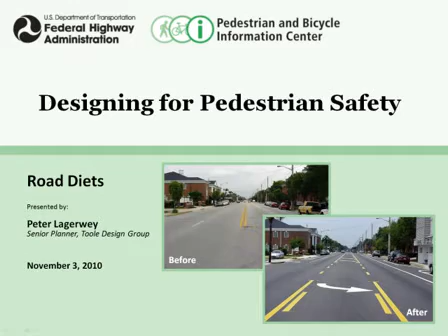One of the things I like to do is think of this as how do we divvy up a scarce urban resource? A scarce urban resource is our street right-of-ways. We have a lot of competition for that space. It starts with general purpose lanes, bus lanes, bike lanes, turning lanes, parking, sidewalks, buffers for sidewalks, street plantings, cafes, all sorts of things we like to do in our street right-of-way. One way to look at planning is to say, how do we divvy up this scarce urban resource? My focus today is that one of the things we should be looking at is doing road diets, because this benefits everyone, including motor vehicles.

So the learning objectives for today: first, to be able to describe how pedestrian crash risk increases with the number of travel lanes and speed. And of course the inverse is how pedestrian crash risk is reduced when you reduce the number of lanes, and how speed is reduced when you reduce the number of lanes. The next learning objective is to explain why reducing the number of lanes reduces risk and makes it easier to cross the road. I'll spend a fair amount of time talking about how this benefits pedestrians.

By the way, a lot of road diets are generated through pedestrian concerns and issues related to economic development, and sometimes it's driven by the need to put in bike lanes, but not always. There are so many good reasons to do road diets, and sometimes the bike lanes are almost incidental to other bigger factors in communities. It's not to minimize the bike lanes, it's just to suggest there's a lot of different ways to get to the decision to do a road diet.

I also want to demonstrate how reducing the lanes frees space for higher and better use. One of the concepts I'll introduce here is total road counts. In other words, are we building roads to just count motor vehicles, or are we going to count people? One way to look at that is when a bus has 30 people in it, does that count as 30, or does it count as one vehicle?

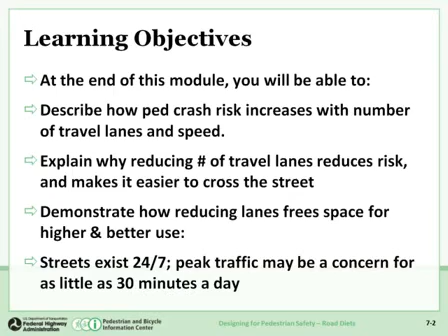So the classic road diet, you can see the picture here: on the left, 4 lanes, 2 lanes in each direction. This is Street Anywhere USA, you can find this street, or a similar street, any place in the United States. Going over to the right, going from 4 lanes to 3 lanes, you can see instead of 2 lanes in each direction, there's only 1 lane in each direction with a center turn lane and bike lanes added. That's your classic road diet, but I'm also going to show you some other examples of different kinds of road diets, including one on a one-way street.

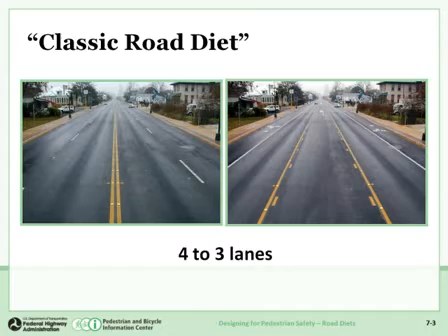So road diets, we reclaim a street for a lot of different uses. This happens to be in Seattle. In fact, I was on the street this morning, less than a mile from my house. And there was an opportunity here to redo the street.

Just as an aside, one of the things we always look for in terms of opportunities to make changes to the street system is whether there's a possibility of tying it to another project. You'll see the newer looking concrete in the center of the street here, and that was because there was a huge sewer line that went down the center of the street. So as part of reconstructing the street, the median was added, you can see that there, along with the center turn lane, and the on-street parking had a little more space. Further up the street, bike lanes were installed.

Since this picture was taken, the bike lanes were actually brought through this section, so if we took the picture today, you'd see the bike lanes here. So you can see that this used to be a 4-lane street, 2 lanes in each direction, and we're able to put in the median, the bike lanes, the center turn lane, and really change the feel and the look of the street. And of course, it still accommodates transit, you can see the bus pulled over there at the bus stop.

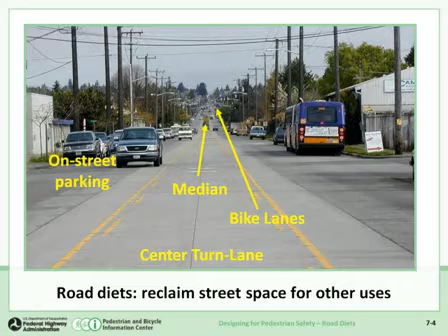So road diets and traffic operations, this really gets into some of the nitty-gritty details that you always have to work out when you're looking at doing a road diet. First of all, I'll just talk a little bit about crashes and safety.

The question here is, what types of crash types can be reduced by going from 4 lanes to 3 lanes? On the left side of your screen, you see a typical street, 2 lanes in each direction. On the right, a typical road diet, you see 1 lane in each direction and the bike lanes, and you also see we've added a left-turning car in that center lane. So that's again your classic road diet.

By the way, you'll notice that trees have been added on the right side too. One of the great things that bike lanes can do is in some situations where there's discomfort with putting in street trees because of concerns about being too close to a travel lane.

Sometimes when you put in a bike lane, it gives you permission to add street trees, which is a wonderful addition. Street trees change the feel and character of a street, and they add value in terms of signaling that this is a place to expect bikes and pedestrians, to slow down. It's a neighborhood. It's all about the messaging that a street gives.

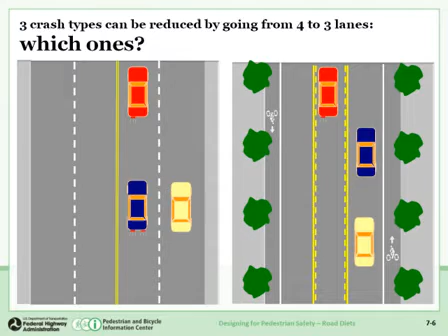That said, let's turn back to the crash types, and we'll go through three different crash types. If you look at the image on the left, you'll see the red car has its blinker on and is going to make a left turn. One of the common crash types you get on a typical four-lane road is rear-end crashes.

This, of course, will vary a lot from road to road. If you're on a road with very few driveways, not in a strip development area, and few left turns, this won't be a common crash type. However, on a typical suburban street with lots of driveways, fast food establishments, restaurants and other businesses, you get a lot of left-turning movement and a fair number of rear-end crashes. If you look to the right, the red car is turning left, and there's no one behind it to cause that kind of rear-end crash. So this is one typical kind of crash that's reduced by going from 4 lanes to 3 lanes.

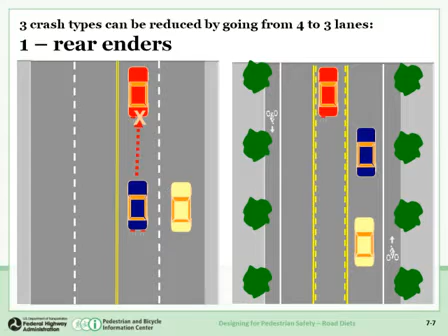A second kind of crash that can be reduced is the sideswipe. We've all experienced this, and probably all done it: someone's turning left in front of you, so you switch lanes and move to the right. Looking at the image on the left, you swerve right so you can continue your trip and momentum without stopping for that left-turning car. Of course, that creates the possibility of sideswiping or cutting in front of a car in that right lane. Cars have blind spots, so the more lane switching you get, the more likely you are to have a sideswipe crash from time to time. Looking at the image on the right, there's no reason to switch lanes because through traffic is already contained within that right curb lane.

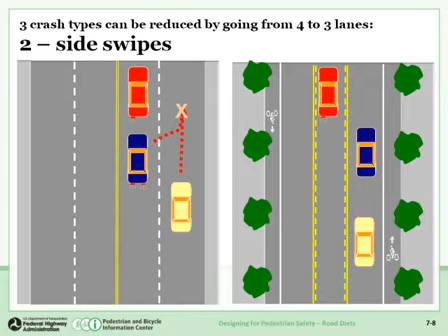There's a third kind of crash that can be reduced by going from 4 lanes to 3 lanes. If you look at the left, the red car in the upper left is making a left turn. Looking at the sight distance drawn in, there are 2 cars coming, one in each of the 2 travel lanes, and you can see how the sight distance is blocked, one car blocking the other. The blue car going north is blocking the yellow car going forward. Now, if that blue car creating the sight distance problem were a panel truck or a bus or a bigger vehicle, this kind of problem becomes even more acute.

I like to compare this to the multiple threat we've all heard about with pedestrians crossing streets. We know from studies that people are frequently hit in that last lane when crossing a 4-lane street, because motor vehicles stop for pedestrians in the first 3 lanes and then get hit in that 4th lane because of this same sight distance issue - the stopped cars stopping for the pedestrian block the sight distance for that final car.

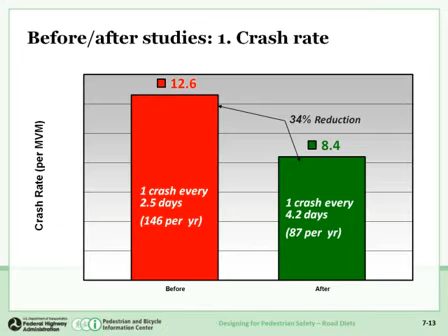So they did some studies, and again we're just looking at this particular example, but I think it's typical of what you find in a lot of road diets, is the crash rate went down. Before they did the road diet on this street, there was one crash every 2.5 days, or 146 crashes per year along this corridor. There was a 34% reduction after the road diet, one crash every 4.2 days, or 87 crashes per year. Different road diets are obviously going to get different numbers, but I think it's typical to see crash reduction rates in the 30 to 40% range. Sometimes it's a little lower, sometimes it's a little higher, but this is probably fairly typical.

If you look at the injury rate, it goes down even more dramatically. One injury every 9 days to one injury every 30 days, a 68% reduction. And this is kind of interesting, and again, this is pretty typical. What happens is, first of all, you have fewer injuries because, we'll look at this in a minute, the speed goes down. So if you have lower speeds, when you do have a crash, you're going to have fewer and less severe injuries.

The other thing that changes is the kinds of crashes that occur. You tend not to have those really terrible T-bone kind of crashes that you get when you're making a left turn and you go in front of somebody else, or even rear-end crashes. More of the crashes you're going to see are sideswipes and some of those kinds of things, so you not only get a reduction in crashes, but a pretty significant reduction in injury crashes. Most of the data I've seen, looking at before and after road diets, seems to validate that injury rates go down actually a little more than strictly the crash rates.

This is kind of interesting when you start looking at the speeding. If you look at the left side here, note that this is the percent of vehicles traveling over 36 miles an hour. The speed limit here is 35 miles an hour. They looked at 3 different sections of this corridor and got some of the changes in that reduction. Again, this is fairly typical. I think it's important to note, though, that this is not average speed or median speed, this is just people who are going over the speed limit.

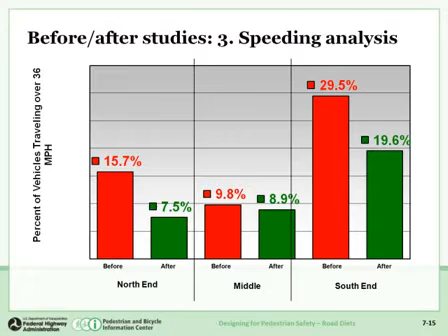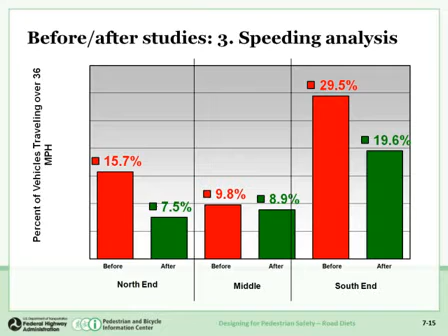What you're doing is quite often preventing the really high-speed folks from going really fast. So now you only have one lane, and that may not affect the average speed so much. In fact, it's not atypical to have a road diet and only reduce the average speed 2 to 4, or 2 to 5 miles an hour, which may not sound like a lot. But if you dig into the numbers, you find it's much more significant when you look at the outliers and the number of people going really fast. So speed is a tricky one, but you get more value out of it than might first appear.

Okay, traffic volumes. This is kind of interesting, and I'll spend a little time here because it comes up in just about every road diet project. In this particular case, they had about 20,000 vehicles per day, this is ADT. Initially it went down to 18,100, then slowly edged up to about 21,000. This little pattern is very typical.

When you first do a road diet, quite often there's a worry that it's going to be congested, so people take another route. Then people soon discover it works really well, it's not a problem, they come back, and it goes up to what it was before, if not a little bit more sometimes, because it might actually work better.

Talk a little about the numbers. People always ask, what's the range? What works for a road diet and what doesn't? Before throwing out a couple numbers, I'll suggest a few things to look at, because different roads are going to have different numbers for when it's appropriate to do a road diet. A couple rules of thumb.

If you have a lot of left-turning movement, if you're in a very urbanized situation with a lot of left turns, short blocks, a signal at every corner like in a downtown or semi-downtown situation, then you can probably go quite a bit higher on a road diet. In some situations you can even go up to 24,000, 25,000 and still maintain that after the road diet, if it's a very urbanized situation with a lot of left turn movement.

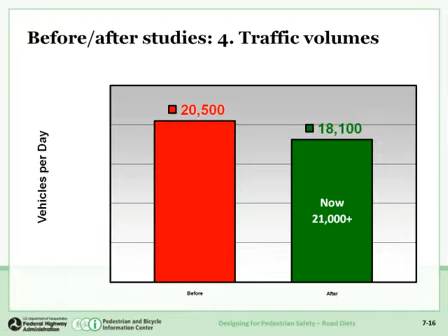And when parking utilization goes up, it means more people are shopping if it's a business area. But equally important is the messaging. If the parking is full, the messaging is: this is a center, this is a center of activity, there's a lot going on here, and this is a good place to stop and do business.

I always like to compare it to going to a town you're a guest in, and you go out for dinner, and you pass a restaurant that's completely empty. You think, the locals know something, it's probably not too good. Then you find another restaurant that's full of people. And as long as you don't have to wait more than 15 or 20 minutes, it might be a really good bet, because the local folks know it's a good restaurant.

Some of that same psychology applies to our neighborhood business areas, especially when it comes to parking. If you're messaging that there's parking here, and that parking leads to more people on the street, leads to energy, your messaging is: this is the center, this is a good place to be, stop, even if it's hard to find a parking spot. You want to be here because this is where everyone else is. So again, start making those links between road diets, parking utilization, energy, messaging, and economic development.

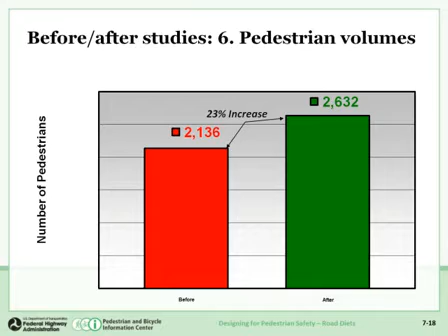And of course, when you get more people walking, that's more economic vitality. People shop, cars don't. So again, you start seeing that economic tie.

Bicycle volumes, in this case, had a 30% increase. They had a fair number of cyclists on the street beforehand, but it went up. This is very typical, very typical kind of jump. I'd actually suggest it might even be a little low; I think we're going to get much more than this in terms of a percent increase. But what it really highlights, and this is what people have been telling us for years, is that the biggest barrier to more bicycling is fear of motor vehicle traffic.

And when you put the bike lane in and you give bicyclists a dedicated space, people's comfort level goes up, and you get more people—the bike volumes go up.

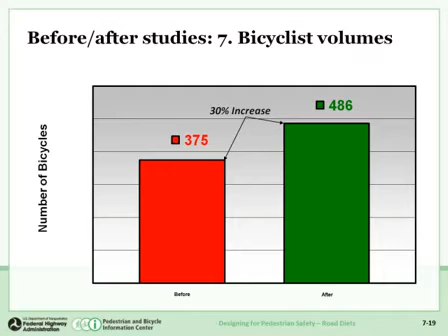I want to circle back to the concept of how we do counts. Do you count just the motor vehicles, or do you count the pedestrians and bicyclists, and a slide I didn't add here would be, do you count the number of people in buses and transit, streetcars, whatever you may have on that street. When you start looking at total street capacity, the story we have to tell about road diets becomes even better.

Looking at the study again, going back to our Orlando, Florida example—did the restriping accomplish the objective? Avoid increasing traffic on neighborhood streets: yes. That's something that always comes up as a worry, and checking that is always important. It's something we've done in Seattle on quite a few of the road diets done here. It just doesn't happen with road diets—people stay on the street.

Reduce speeding—we did that. Increase bicycle volumes—you saw the numbers on that. Same with increasing pedestrian volumes, reducing crashes, increasing on-street parking—increase.

These last two are a little fuzzy, but they're also really important, and these are things you ask people in follow-up surveys: did it increase your overall satisfaction? Do you like it? Does it work for you? The look and feel issues are so important, and they may be what drives ultimately transportation behavior—in some cases, more than just about anything else.

Is it inviting? Does it feel good? Are there people here? Is this where I really want to be, to spend my time, to do business, to live? Those softer kinds of things should always be looked at—they're really important. Usually you want to look at both people who live in the area and their satisfaction, and then also people coming into the area for business. Both very important.

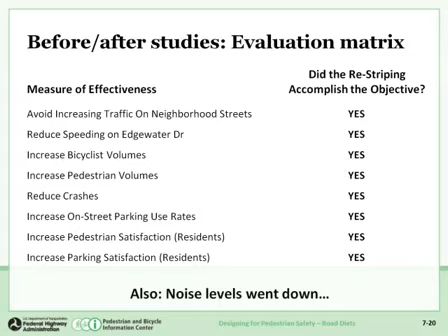One thing that could happen is people use the center turning lane as a passing lane—that does happen. That's why, when you do a road diet going from four lanes to three lanes, you want to build in some median crossing islands, spaced to do two things: provide a crossing island for pedestrians, and break up that line of vision to prevent people from using the center turn lane as a passing lane.

There's a lot you can do in that center turn lane. In addition to spot crossings, you can put in sections of median. That's sometimes controversial because it prevents left-turning movements into businesses—that's almost a separate topic, an access management issue in itself.

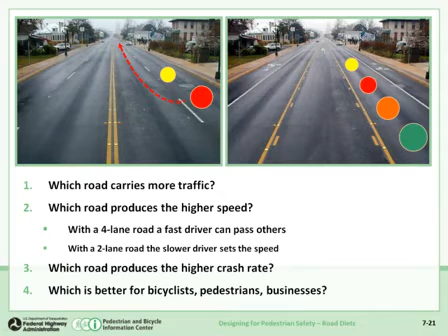Going away from the example and looking at the national average, there have been some studies done, and there'll be more studies coming out in the future. In general, you can expect close to a 30% overall crash reduction factor from doing this. For those of you who follow the CRF, the crash reduction factor, and look at all the different tools available to us—there are at least 50 or 60 standard traffic operation tools we have to reduce crashes—you'll know that getting close to 30% is a really high number in terms of effectiveness of a particular treatment.

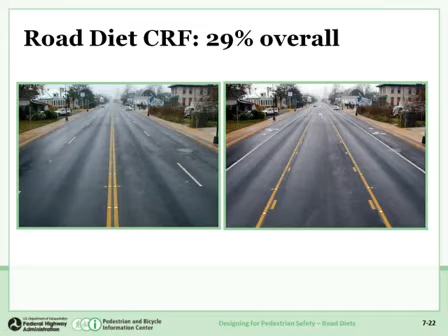So what are some of the benefits of road diets for pedestrians? I want to spend a little time here because, as I mentioned in my opening remarks, quite often road diets are driven by a need or desire to do something for cyclists, but increasingly I'm seeing road diets done because they really benefit pedestrians as well. One of the nice things about this is that everyone's a pedestrian, so you have a bigger audience to support this when you look at some of the things it does for pedestrians.

It reduces the crossing distance. And we know there's a relationship between the crossing distance and the number of crashes you're going to have involving pedestrians when they're crossing the street.

It eliminates or reduces the multiple threat. I touched on that earlier when talking about motor vehicles having a multiple threat when crossing two lanes. In this case, we're reducing the multiple threat for pedestrians because you cross one lane, and even if you don't put in a crossing island, you're only crossing 3 lanes instead of 4. If you install a crossing island, then you're only crossing 1 lane at a time. There's a pretty strong relationship between the number of lanes, the crossing distance, and the number of pedestrian crashes one might expect.

Almost always, crossing 1 lane of traffic is going to be very safe. Adding the crossing island allows you to cross the street in 2 steps, with the island serving in the middle where you can cross, stop, look, and cross again. You don't have to cross the street in one movement.

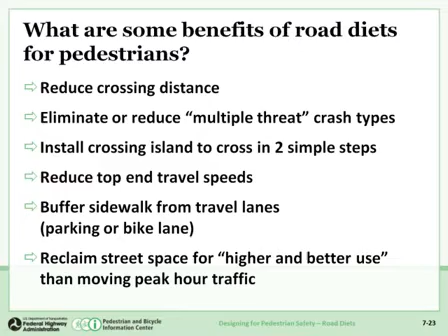And so you go to the next image, and this was the concept that was proposed. You can see adding a crossing island and adding the bike lanes, a standard road diet, 4-lane to 3-lane.

What this did, of course, is added the bike lanes, the buffer, but more importantly in this case probably is for the pedestrians - it allowed them to cross 1 lane, go to the center crossing island, and then cross the other lane. And once you cross that first lane and go to the crossing island, your sight distance opens up quite a bit, and you can see the oncoming traffic. So a crossing island can also be a tool to address sight distance issues if that happens to be the situation. Now here's the reality.

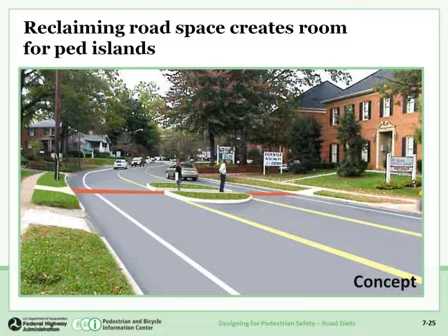This is what was put in, and you can see it worked very, very well, solved the problem. Again, you can see that it reduced the exposure time, the crossing distance - exposure time being the time that a pedestrian is in the street right-of-way where you expect motor vehicles and has that exposure.

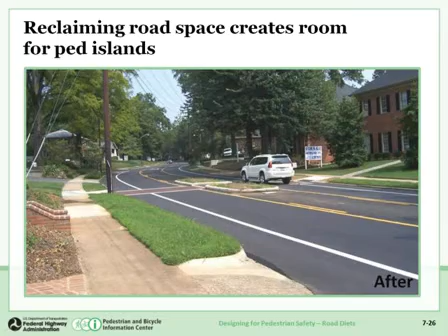I'm just going to show a couple more examples here. This one I really like, and I would encourage you to look at this really closely for a minute, because I'm going to show you the before and after. Just describing this, this is really a wide street - it has 2 lanes in each direction, center turn lane, plus parking. So a really wide street, and here's the next image.

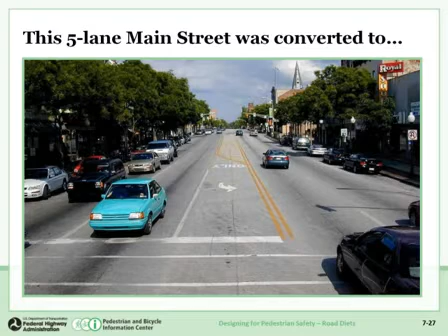Just a few comments about back-in angle parking and some of the advantages. First of all, when you have back-in angle parking, it means that you can put in a bike lane and be comfortable about it, because people who are coming out of the parking spot can see the oncoming cyclist. So there's a huge advantage for the cyclist. But it also has a lot of other advantages.

With regard to crashes, a lot of people are not very good at backing out. You can think of it as you have 2 choices. If you have traditional head-in angle parking, you have somebody backing out into motor vehicle traffic that they can't see quite often, especially if you park next to a panel truck or a big van. So you're backing out, and if you have a crash, you're having a moving vehicle hitting a moving vehicle, both with people in it, and you're likely to have an injury. If you're backing into one of these spaces and you happen to hit a parked car, then you're hitting a car that's not moving and most likely has nobody in it. So even if you do have a crash, it won't be an injury crash.

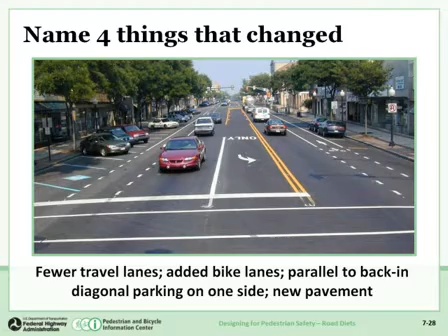Finally, there's a lot of potential on one-way streets. Back in the 50s and 60s, a lot of our downtown areas were turned into one-way couplets. This really increased the capacity of the street—the intention was to facilitate movement of motor vehicles and get the level of service up, and it accomplished just that. It made it easy for people to leave town, and they did, and we ended up with a lot of dead downtown areas. The whole notion of one-way streets, synchronizing signals, and helping people get out of town as fast as possible sends the message that our town is not where you want to be—in fact, we're going to help you leave as quickly as possible.

That's why you're seeing a lot of movement toward reestablishing two-way streets in downtown areas, because you want to create the notion that when you're in a neighborhood commercial or downtown area, you're at the center of the world. You don't need to leave quickly because you've arrived—this is a destination. That psychology of streets becomes so important when it comes to economic development.

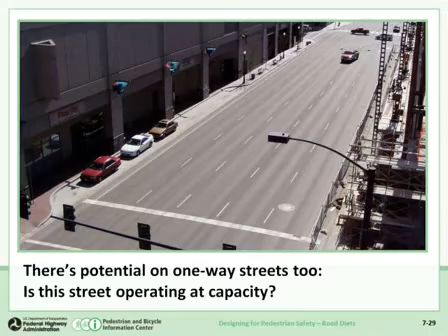So just in conclusion, hopefully now you'll be able to describe how pedestrian crash risks increase with the number of travel lanes and speed, explain why reducing the number of travel lanes reduces risk and makes it easier to cross the street, demonstrates how reducing lanes frees space for higher and better use, and also the notion that we shouldn't be building to peak traffic.

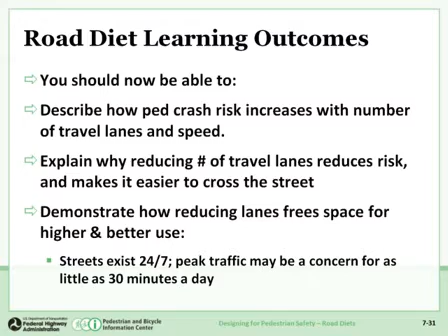By the way, I might add to that special event peak traffic, like building a whole street system to accommodate 6 or 7 football games a year around a particular stadium. It usually doesn't make that much difference because you're going to have police officers and traffic control folks out there directing traffic anyway. It's a completely different situation. So again, look at highest and best use.

And with that, I will open it up to questions.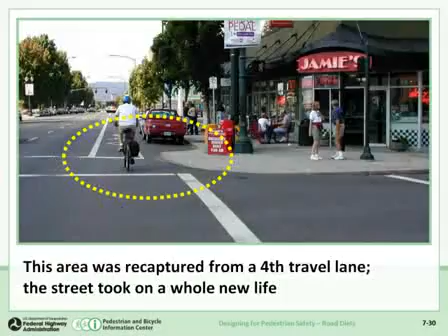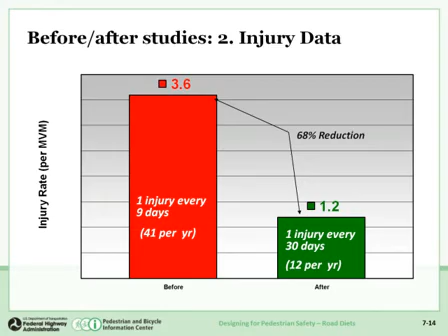Okay, thank you. The next question refers to slide 7.9. It says: regarding the left turn / broadside crash type, a bicyclist in the bike lane is still shielded by a vehicle in the adjacent travel lane. Are you saying that it is not okay to expose motorists to broadside crashes, but it's okay to expose bicyclists to the same crash type?

That's a good question. What I'm suggesting here is that when you only have one motor vehicle lane - this would be on the right side - the turning vehicle coming from that center turn lane is going to be much more likely to see the bicyclist than if there were two motor vehicle lanes. So if you had two lanes, as shown on the left side of the screen, and we pop the bicyclist into that situation, the ability to see that bicyclist will be diminished. So on the right side, it's much more likely the turning vehicle will see the cyclist, because there's less opportunity for the cyclist to be blocked by one lane of traffic than by two lanes of traffic.

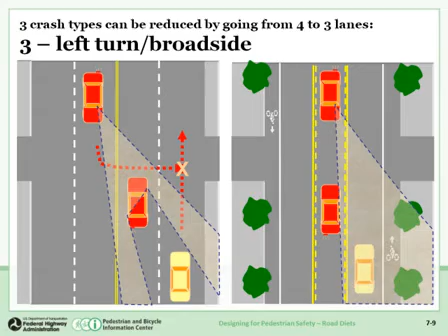Okay, the next question asks: in the Edgewater case study, what if the parked car opens the door and encounters oncoming bicycle traffic? I'll move up here and go to that. That's a good question.

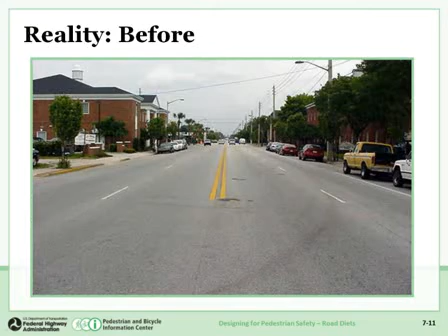Let's see, I went the wrong way. Sorry about that. This is a good one right here.

One of the things I think is important when you put in bike lanes next to parked cars is two things. One, the bike lanes should be at least 5 feet wide, and two - you can see this on the right here - you use two paint stripes. There's a stripe defining the parking area, and a second stripe defining the bike lane. What that parking stripe does is give people something to work off of, making it easier for them to tuck up against the curb, so they're not out in the bike lane. That way, when they do open the door, they're not going to catch the cyclist. Usually I recommend the parking lane stripe be at least 4 inches wide, and the one near the travel lane be 6 inches wide, so it really stands out. The lane stripe by the parking will last longer since it doesn't get as much use - probably several years - whereas the other lane stripe wears quicker. I mention that because in all these designs you want to think about maintenance. So there are design elements built into bike lanes that begin to minimize the car door issue. Obviously, if you have more space, you sometimes have the opportunity to put a buffer between the parked cars and the bike lane - a 2-foot hashed area, or 1 foot, or 3 foot, whatever space is available. That's another design option you have.

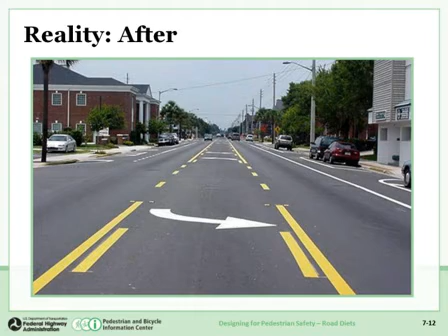Okay, and I believe you may have touched on the next question, but it says slide 717 shows the parking utilization increases with a road diet. Is that a good thing for bicyclists if the bike lane is within reach of open car doors?

Yeah, again, that's a good question. And I think in general it's good for bikes in this sense of the word.

If you have an area that allows parking, but it's spotty, it kind of comes and goes, quite often what you're going to end up seeing is a pressure for cyclists not to go in a straight line, and where there is parking, to be out more in the street, and then the parking bit goes away for 150 feet or something, and all of a sudden you pull over to the curb because cars think you should move over, they want to get around you, say, and then you go back and forth, and it's really that back and forth that is something you really want to avoid. One of the principles of vehicular cycling is that you really want to queue in a straight line and be very, very predictable. And when you have really spotty parking, that predictability sometimes can go away.

So I think the added parking certainly helps address that issue. You're much more likely to go in a straight line. But probably even more to the point is, again, looking at the overall messaging of the street.

And when you have a lot of parking, you have a lot of pedestrians, the overall messaging of the street is not only go slower, but expect to see bicyclists and pedestrians. When drivers are interviewed who have just hit a bicyclist, just hit a pedestrian, almost always they will tell you, I didn't see the bicyclist, I didn't see the pedestrian. And I think very often that's an honest answer, because they didn't see the bicyclist or the pedestrian, because they were not expecting to see one.